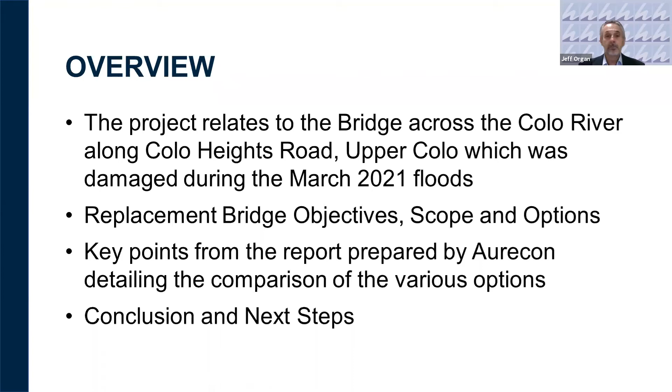So this is basically connectivity 101. We want to make sure that this bridge here improves access and supports the heavy vehicle movement necessary in the local area, and I'm very conscious of not saying this is going to open this up to highway style traffic. This is about making sure that the local community can get their farm vehicles and fire tankers and all those things across, and that and no more.

But we've got to design that road and bridge to be able to do that, and also to make sure that the journeys that everybody is going on are reliable and safe at all times. And that's going to continue for many years. So our objective is to have longevity in that, and making sure that it's resilient to the somewhat harsh environment that exists up there in terms of flood and fire in the rural areas of the Hawkesbury, and particularly in Upper Colo. And we've also got to make sure for the overall community that we've got a cost-effective construction, and make sure that our future maintenance is readily done and is, as I said, cost-effective.

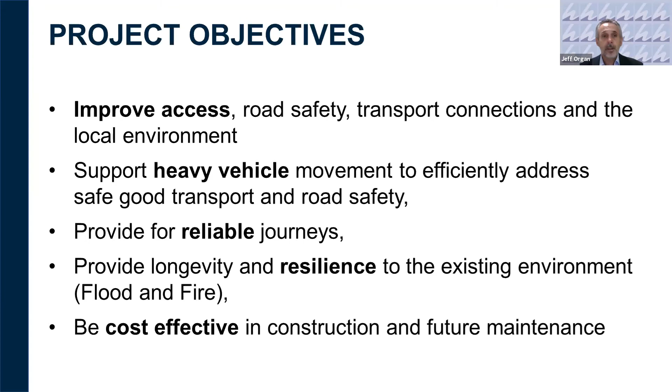So in terms of the scope of what we're looking at: replacing basically the existing bridge, maintaining the existing waterway area under the bridge at least, and designing the structure for the frequent overtopping that occurs. As certainly demonstrated by the flooding, the pressures on a bridge structure are enormous and can take, particularly a timber structure, a long way downstream. There's also those overtopping loads.

And at the moment, that deck level on the old bridge is around about 5 metres AHD. AHD basically equates to above sea level for all intents and purposes. And as you're aware, there's certainly significant potential for floods to go above that height, with the 1 in 100 year flood level around about 20 metres. So 15 metres of water over that bridge in a major flood. There is some potential to raise that bridge up by around about 1 metre to provide some better flood immunity in smaller floods, but certainly not considering raising the bridge up to the 1 in 100 year level.

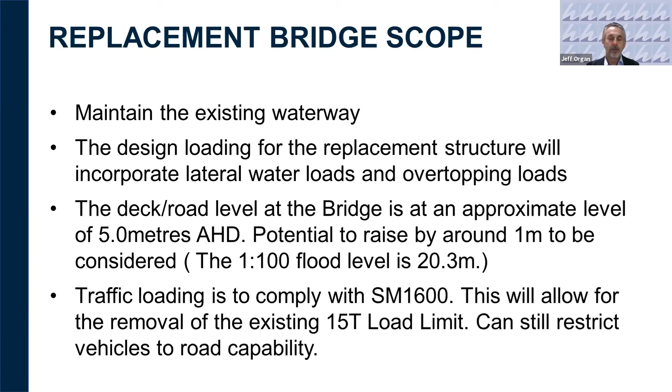Again, just the traffic loading, we want to design this bridge to contemporary standards. It's currently got a 15-tonne load limit on it, but we'd certainly remove those restrictions with a bridge that's designed to contemporary standards. But as I said before, we can still ensure that the vehicle or any other restrictions on the immediate road network are maintained to maintain the safe passage and the road capability. So just because we have a bridge that can withstand heavier loads doesn't mean that we're going to open up all the network to heavy vehicles.

So really the two straightforward options are to replace this bridge in a timber or reinforced concrete structure. And following some discussion with council the other week, we did look at steel options. They're not particularly viable, and I'll let Tom talk about that. As I said, we're going to try and match the bridge deck level to the existing heights, or with a slight increase. And the new bridge being similar, so a single lane bridge, but with a pedestrian pathway or area on the side. The existing bridge is around about 6 metres, with about 5.5 metres between the curbs.

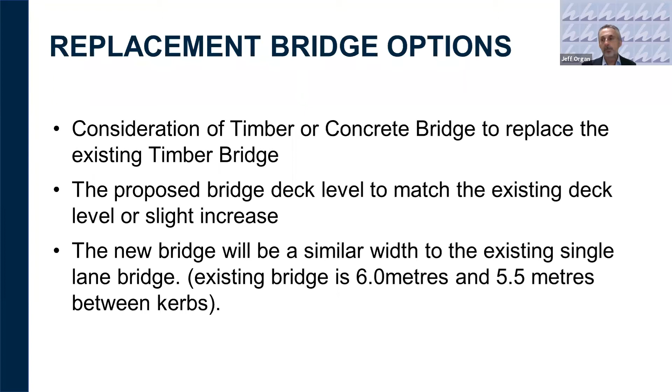So we did commission this options report from Aurecon, looking at replacing in timber or concrete, satisfying those load limits, and looking at all the life cycle cost issues, which go really to the heart of that longevity that I talked about earlier, and reliability.

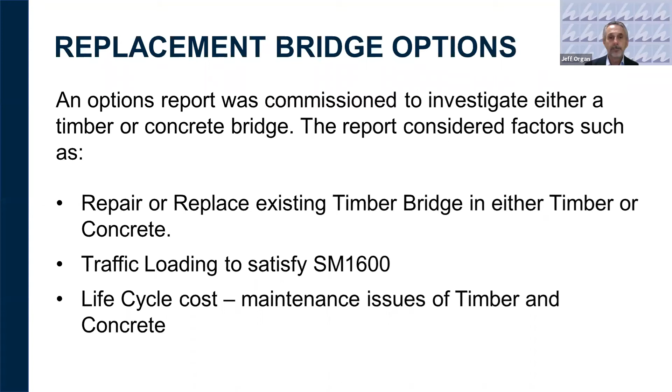So the other aspect of this is obviously that there's been a fair bit of discussion about the heritage value of the site and the old bridge. As I said, it's had a number of gestations, so various elements of this structure have been replaced over the years due to flood damage, with it originally being built back in 1938, I think it was. So there's certainly been some damage done to it, and deterioration, and works have been carried out at various times.

So we're very conscious of the setting of this bridge, and we certainly do understand there's some sympathy for replacement in timber. But we need to look at this from an objective point of view and say what's going to give the community the best overall outcome. That's why we've engaged Aurecon to do that independently.

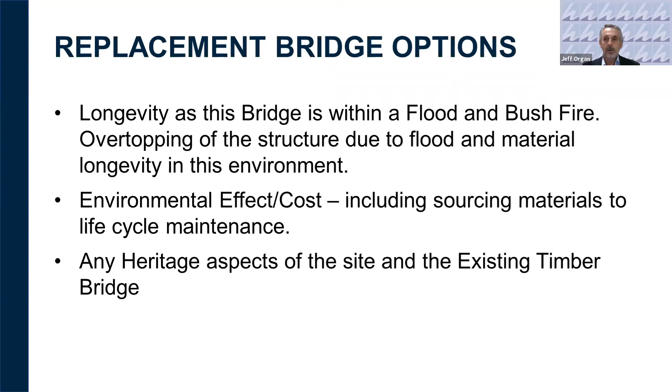So with that, I'll hand over to Tom. I'll stop sharing for the moment and let Tom introduce himself and continue through.

Tom, you're on mute. Yes, there we go. There we go.

Yeah, thanks, Jeff. Councillors and community members of Hawkesbury local government area, it's my pleasure to present a summary of this report that we've put together. My name's Tom Sheasby. I represent Aurecon, and let me just get this going. So we were commissioned by council to investigate a suitable option for reinstating the crossing over the river.

Aurecon is an engineering, design and advisory company. We operate across Australia and New Zealand and in parts of Asia. For many decades, we've provided services to Transport for New South Wales, the Bridge Engineering Group, if you like. And they have a whole lot of timber bridges that they maintain and have looked after over many years. They have something like 1,000 timber bridges.

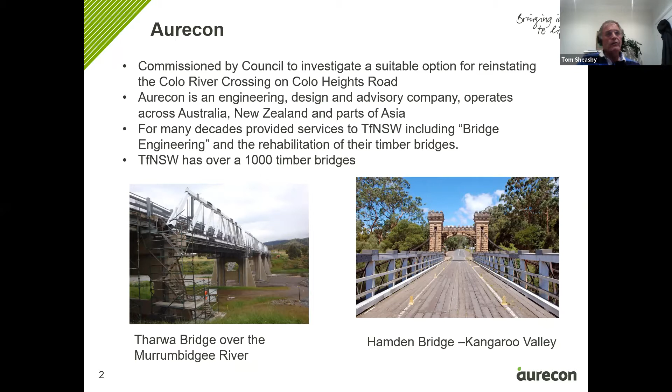Some of the bridges that we've had involvement in are the two pictures down below. Tharwa River Bridge over the Murrumbidgee, where the trusses were completely rebuilt, and then the Hampden Bridge down in Kangaroo Valley. Both those bridges are heritage listed.

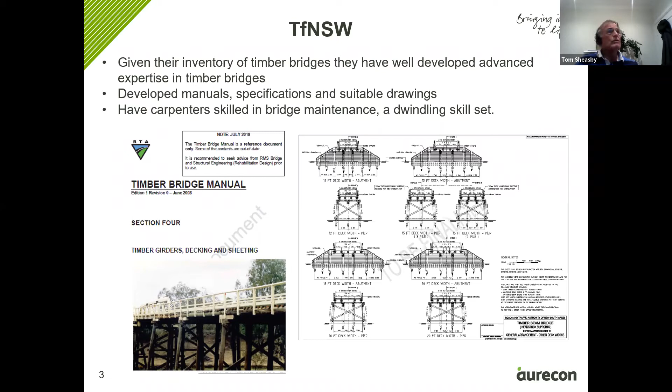So for the timber options on the Colo River, we've relied on the tried and tested materials, standards, maintenance requirements, and life expectancy based on Transport for New South Wales experience. We visited the site on the 16th of July. And as you know, the damage is on those three northwestern spans that went missing in the March flood.

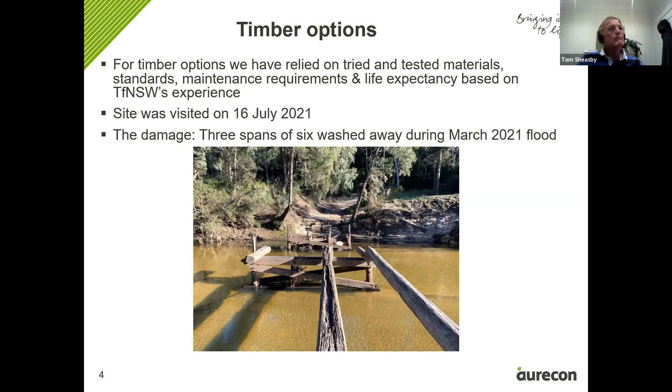So the crossing, just to summarize the level of susceptibility, is susceptible to flood damage, washaways. A feature of the crossing is that it's comparatively regularly overtopped, which is unusual for a timber bridge. It's also susceptible to fire damage, being in a well-vegetated area. Its support piles are in standing water, which is not recommended in the Australian Bridge Design Code, the latest version. And timber requires regular inspection and maintenance as documented in Transport for New South Wales manuals.

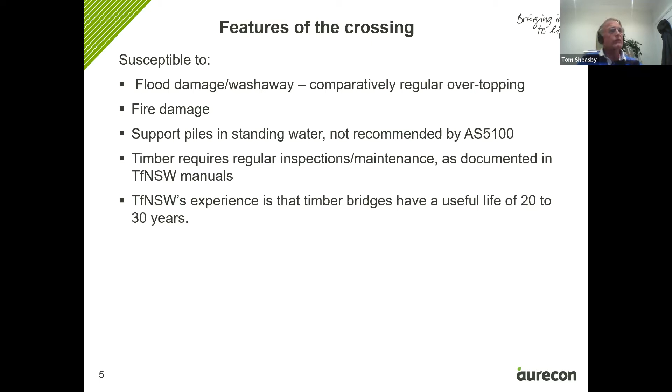Transport for New South Wales, from their experience, have determined that timber bridges really have a useful life of between 20 to 30 years. So all of these features were taken into consideration in considering the options. There were two timber options considered. We called the one T1 and the other one T2. T1 is rectifying the existing bridge, in other words, merely reinstating those three missing spans together with the piers and substructures. And then T2 was a complete rebuild.

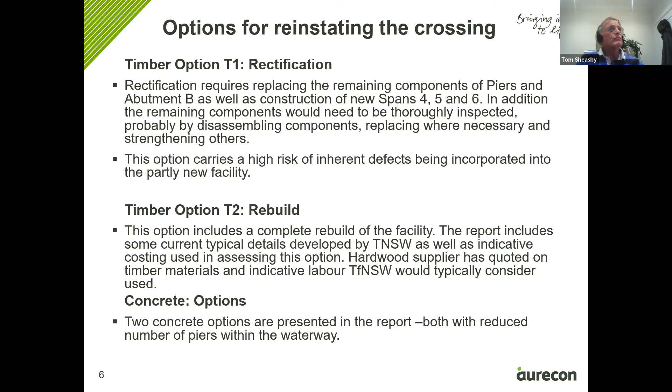There was a concrete option considered. We split that into two sections, but essentially they're both concrete options. I don't think I'll run through those points. We'll just move on. So in the options comparison, we've included a table that identifies 10 ranking points or constraints associated with each option, and we rated them with a number between 1 to 5, 1 being the lowest score in terms of handling that constraint, and 5 being the more preferable rating against handling the particular constraint under consideration. There's a degree of interpretation as to how you do the rating, but at the end of the day, you can change the numbers slightly, but the outcome we believe would not really change.

So I'd like to just run through these particular constraints, and the first one is the inspection regime. So we rated concrete the best there, whereas the 2 timber options get a lower rating. Timber requires annual inspection with a more detailed inspection every 3 years. And then the concrete option, really, you don't need to inspect other than perhaps after a major flood event. But nevertheless, we've allowed for a 10-year cycle.

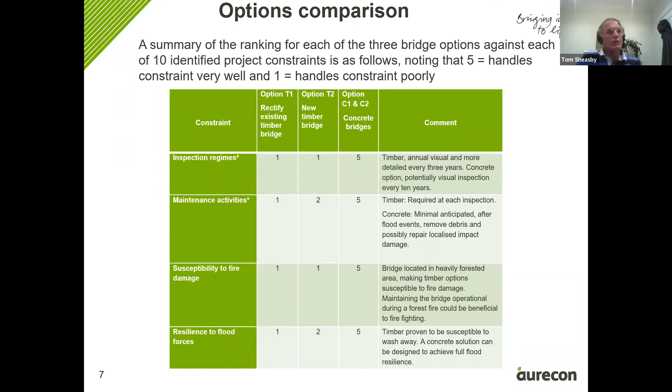The third constraint then is susceptibility to fire damage. Timber, of course, by its nature rates poorly, whereas concrete would rate top marks. I think that's self-explanatory. Resilience to flood forces, we've rated concrete highest. The concrete options can be designed no matter what the level of flood is that crosses over the bridge, whereas timber is susceptible to flood damage. And of course, that's been proven with this recent March flood.

Material availability: in the pricing and consideration of timber, we approached a hardwood supplier who provides regular supplies to Transport for New South Wales, and there is a selection criteria that they have to go through, particularly selecting certain types of timber, and there's generally an 8 to 10 month delay in obtaining those timbers. And of course, concrete and the reinforcing is far more easily available. So we've rated the concrete option higher than timber on the material availability criteria.

The design life: timber, once again, 20 to 30 year life, whereas concrete can be designed as a default option really for 100 years. So it scores top marks there as well. The design loading on concrete would be designed for taking the maximum load that's within the standards. But more importantly, that load rating doesn't deteriorate over a period. It remains at whatever it was initially designed for, whereas timber does diminish, which is borne out by the fact that that bridge, prior to its damage, was rated at, I think, 15 tons. So on design loading, concrete scores the highest, whereas the other two are much lower.

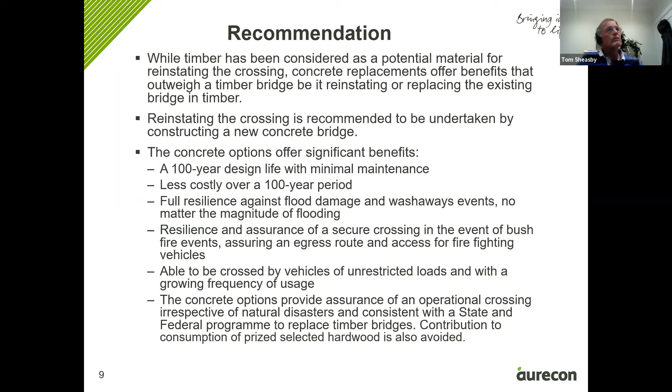Its resilience and assurance of a secure crossing in the event of bushfire events, assuring egress, which is important, as well as access for firefighting vehicles. It's able to be crossed by vehicles of unrestricted loads over its design life. And the concrete option provides assurance of an operational crossing irrespective of natural disasters, consistent with state and federal programs to replace timber bridges. Contribution to consumption of select hardwood timber is also avoided, and I suppose that goes to the question of sustainability.

So looking very quickly at the cost, and the costing schedules are included in the report, if you look at the right-hand column, the two timber options over 100 years, taking pure cash flow, would be 4.4 million over 100 years, whereas the concrete option is 1.7. If you adjust those figures to a present worth value using an inflation rate of 2% and interest rate of 4%, those numbers come down to 2.4 for the T1 option and 2.35 for the timber T2 option. And the concrete is still the lower figure, being around the initial capital cost.

And that's all from me, Jeff. Okay, thanks, Tom.

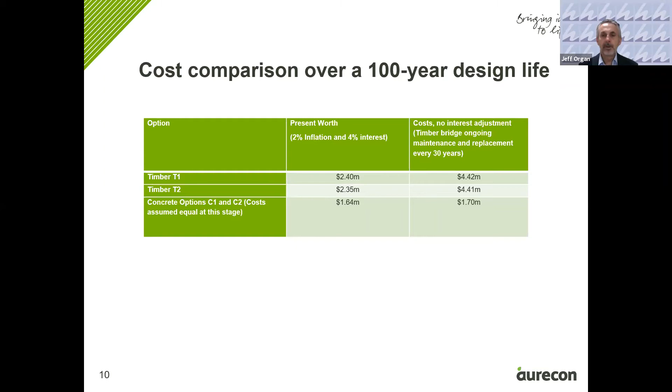So I guess that's the technical side of that. And I should also add that Aurecon have not been engaged to do detailed design of either timber or concrete options. So they are basically independent of the process.

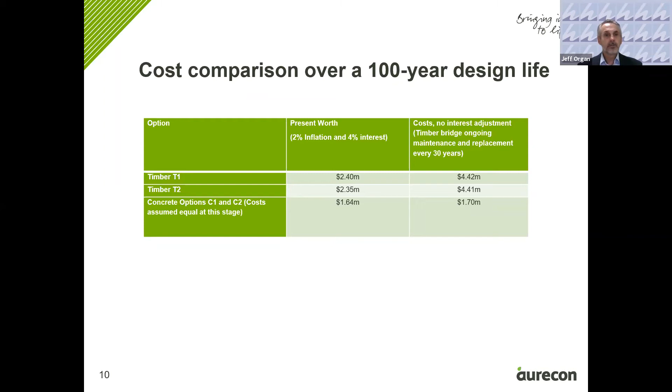So the next part of the presentation is really about, as I said, certainly aware that there's some desire potentially for a timber bridge, and there's other values there. Probably just add to Tom's presentation that obviously timber bridges were the material of choice and convenience for many bridges. As I said, there's still 1,000 timber bridges that Transport for New South Wales operates.

Council also still retains a number of timber bridges, but over the last decade or so, we've certainly been replacing those as part of that Commonwealth-funded program to provide better resilience into the road network. So again, we've replaced, I think, 6 or 7 bridges in recent years from timber, which were failing, load limits on them, to something that's probably contemporary and the better solution.

So we did pursue the issue of the timber option right from the early days, and I know a number of the people in the community were talking to a company called TRS, and we were also speaking to them as well. They're a well-recognised firm in timber construction for various structures. So we did have some discussions with them, and they gave some initial advice, and we did engage them.

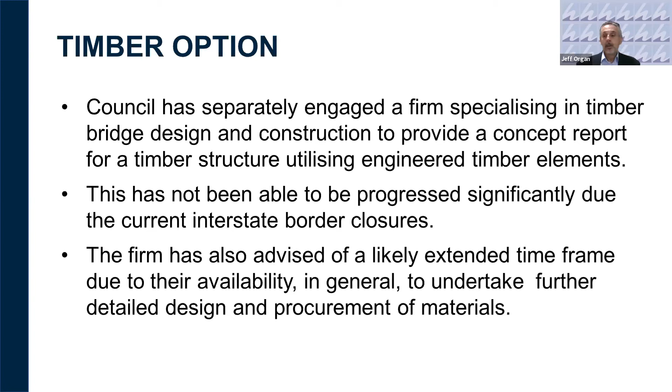So people may have seen some of the options. So this is the company that we're talking with, TRS, and WRD is their design arm. So again, they're the contemporary solution for timber bridge structures for new or replacement, other than strict heritage renewal. And some of those bridges that Tom showed for Transport for New South Wales are quite distinct and quite unique.

The TRS option is generally to use what we call engineered timbers, laminated beams, particularly for headstocks. Still relies upon timber piles, normal tree material for that, and also for the bridge girders themselves generally. Basically, what you're looking at in this image here is they actually use glulam and giant plywood panels essentially as your bridge decking material, because again, it's an engineered product and you have some knowledge and ability to predict its behaviour under load.

The normal process with that is that you don't actually see the timber bridge because a bitumen seal is applied over the top of that for waterproofing purposes, and because of the nature of those glulam panels. It is possible, of course, to build the bridge in the same style as the existing bridge, with decking materials and running boards on those. But again, they're subjected, particularly in this case, to frequent inundation.

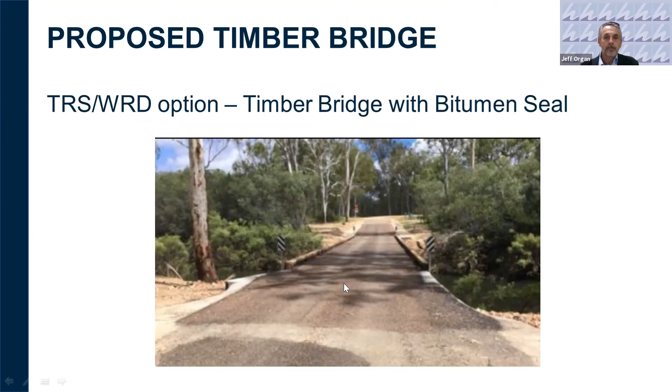Another view of that, which is a little bit clearer. Another bridge that TRS have built using that methodology I talked about. So again, they've got a concrete ramp approach on this side here. And again, the timber curbs with scuppers to allow for drainage and the seal over the top.

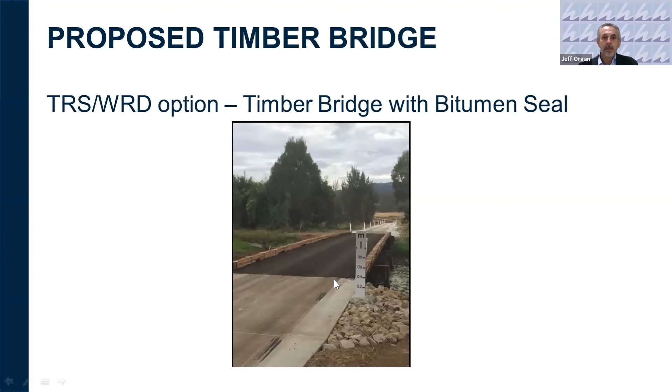So that's basically the point that it got to. We can certainly continue that on, but there are some delays, and I'll go through those at the end of the presentation in terms of timeframes, if that were to be the option selected.

We did look at the reinforced concrete bridge option in a fair bit of detail in parallel with the timber bridge option, and we do have preliminary designs in progress. And as I said, the market there is well experienced in designing these structures. They're relatively simple engineering structures that can be designed fairly quickly.

So the geotech investigations were undertaken, obviously down to what the bearing material in the river itself appears to be. We looked at a range of options, and given maintaining waterway and the need to get slenderness in the superstructure itself, replacing it with a 5-span bridge.

And we could also look at, again, preempting the appearance issue, some of the non-structural elements in the bridge, such as the kerbs being constructed in timber, so that it gives you that similar appearance to what we looked at in that TRS image.

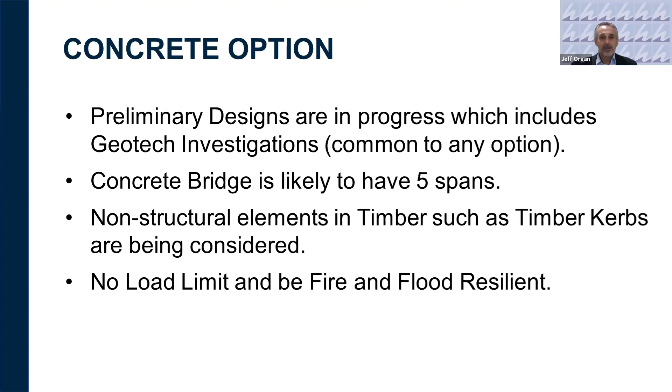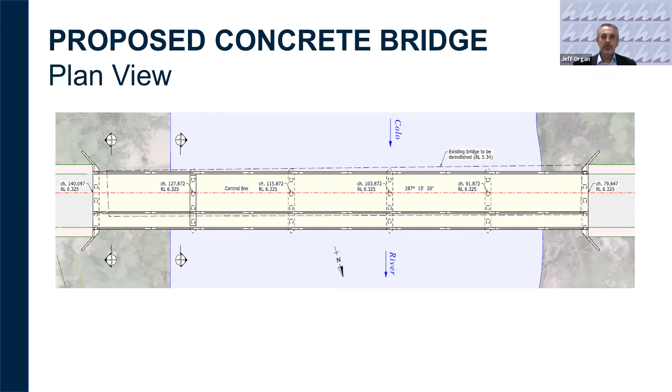Again, in a cross section, this is not shown, taking the piers all the way down to the bedrock in the river. So we understand from the geotech and also the original design plans for the timber bridge that bedrock's around about 20 metres down below the normal bed level of the river, which is also an issue in terms of procuring suitable bridge piles in timber. If you're looking at turpentine, it's very difficult to get engineered quality piling 20 metres or 25 metres long, and they would probably need to be joined as they're driven. So again, another weak point in that.

And I sound like I'm probably talking down the timber option, but I make no apology for that when we get to the end.

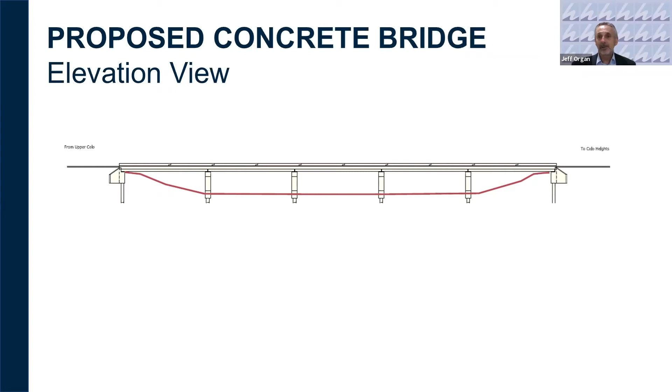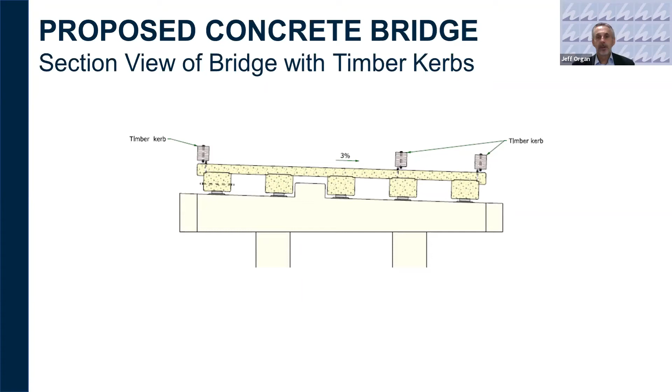And again, just the configuration of how a concrete bridge works. We've got the kerb, the cast in situ deck level, pre-stressed beams below that, then what we call the headstock, which distributes the loads from those beams. They go into the columns, and the loads from those columns are transferred down into the pile cap and down into the piles that are driven into the river. So regardless of whether they were timber or concrete, these would be driven piles, not bored, and driven down to refusal at bedrock level.

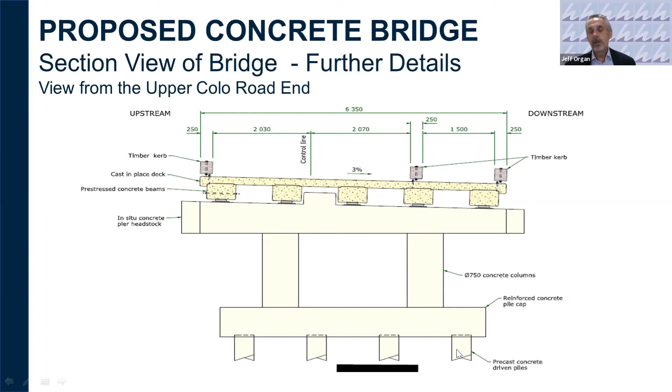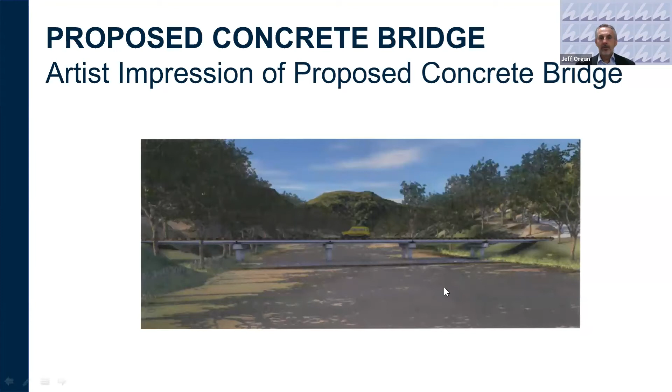Again, just a mock-up. Certainly, this is a shorter bridge, and we've shown the timber kerbs on those. We've only shown two here just for clarity, so you can see that. Again, with a concrete deck, we wouldn't put an asphalt seal over that concrete deck. We normally leave those exposed. It doesn't preclude a seal into the future if there's deterioration of the immediate concrete surface. So again, the visible area would be with the timber kerbs.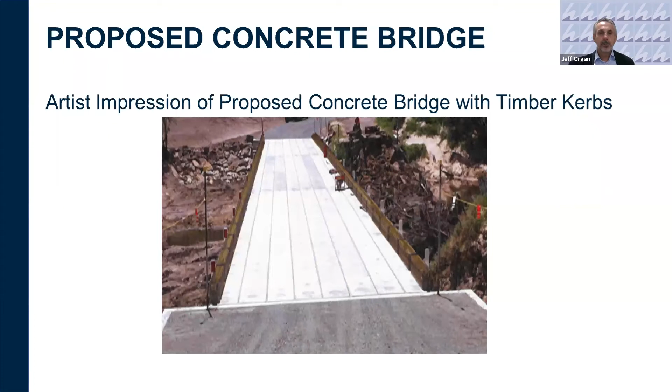As I've indicated, we know there's a certain level of community sentiment to retain or replace the bridge in timber. It's certainly not our recommendation that would be the desirable thing to do. Certainly not the T1 option. Nobody can guarantee what the condition of those piles are below the water. If we were to retain that structure, they would need to be replaced. So certainly the option of reinstating or repairing the existing bridge, I don't think it'd be very easy to find somebody who would certify that.

As I said, the issue out here too is also that this is a bridge that at this level, as a low-level structure, is certainly inundated and subject to significant flood forces, but also the damage that occurs from debris loading, and also being underwater for a certain period of time is not good for timber in that area.

We think there's a number of options to achieve a higher level of aesthetic quality, as I said, using timber elements and minimising the depth of the superstructure, and potentially some neat engineering solutions to make those headstocks appear a little bit more slender from the outside appearance looking upstream or downstream.

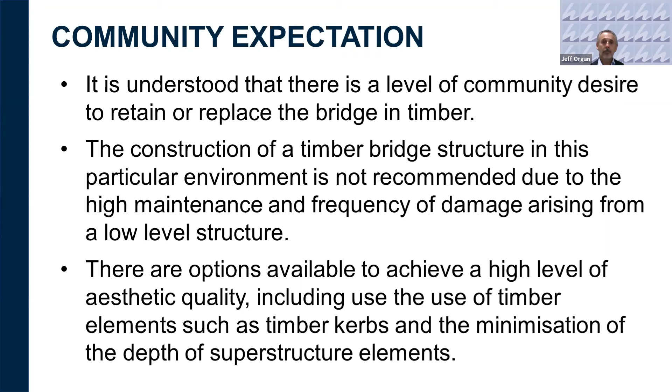The next steps in this, I guess, and this is kind of a timeline to just indicate the other aspect of this, which is the constructability and the time to get this going. If we're looking at a concrete bridge option, we believe that the design can be finalised in the next 6 to 8 weeks, taking us up to around the end of October. In parallel with that, we would undertake the planning approvals. That'd be the review of environmental factors.

So when you're doing anything, particularly in a waterway, we've got to make sure that all of those environmental issues are ticked off and managed. That's part of the course of doing these things. So fisheries, we've got Aboriginal and European heritage, threatened species, all sorts, and other regulations that apply to this.

In parallel with that, but probably concluding in early November, we would prepare the tender documentation based on that design and any requirements from the environmental studies, and put that out to tender. Ideally, we'd be trying to aim for late November, but December, January, going to tender, and then awarding in late February or March.

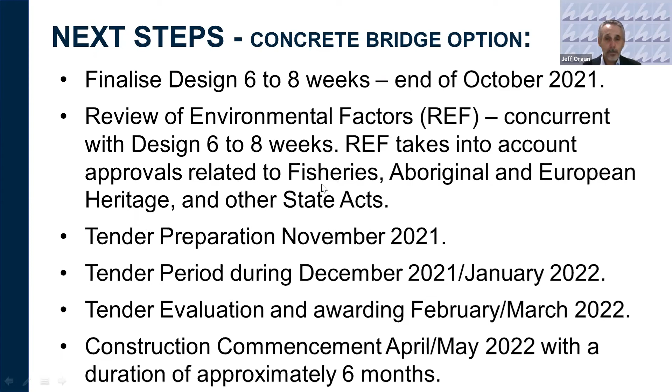That would enable a construction period of around 6 months. So it'll take us up into the early third quarter of 2022. So around the July, August period for construction of the concrete bridge option. Excuse me.

Basically, in the comparison of those timelines for the timber bridge. So as indicated, if we were to use TRS, it's unlikely that we'll complete that design in the current calendar year, simply because of the delays in access likely to be able to get across from Queensland. Obviously, there are other companies that can do timber design, and Aurecon could certainly do that, I guess, or any other firm.

However, the key thing is all of those other aspects. Concrete is a far easier design option, as said, with well-known methods and practices in place. It's relatively easy to get that done compared to a timber design. Having regard for those timeframes, we would not be likely to get out to tender until May, early June of next year. That also includes, as I said, the potential delays in timber supply. Again, that would affect the design.

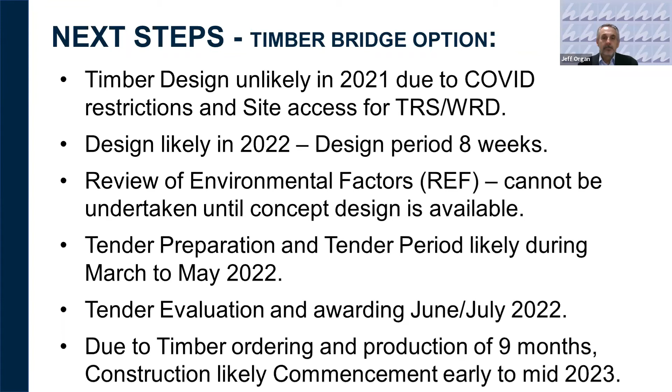There may be that we can look at different alternatives in timber. I'm not certainly ruling out and making the supply issue of the timber critical, but as I said, even if we started today and knew exactly what it was that you wanted, you're looking at 8 to 9 months, which is still taking us up to supply of timber in the April of next year period before you would even start construction. So again, there's probably at least a 3 to 4 month, being really optimistic with the timber option, delay compared to getting a concrete bridge underway.

So I said, I've got to be really blunt and honest. I said, the existing timber bridge really should be replaced with a concrete bridge. This is the one thing that's going to give the community the reliability, the longevity, and the broader community the cost saving that comes with having a properly engineered structure out there that's not subject to the vagaries of flood and other damage.

I'm certainly happy to make the more detailed report that's been prepared for council by Aurecon available, and certainly have the community make comment on that or ask any questions on that through an engagement process.

I think the other thing too that's come up is that we can actually salvage the timbers. Normally when a timber bridge is removed, the last thing anybody thinks of is what you do with the old bridge timbers that maybe could be repurposed, remilled and put to some other use. So we think there's some options there, and we'd be looking at having those materials salvaged and going through a process where they might be able to be reused in the immediate area there, potentially in the small car parking area on the other side of the river on Colo Heights Road.

As I said, I think we can also, in the concrete design, explore some options to maintain some degree of aesthetic qualities in there, and make sure it's in keeping with its setting. Again, that can be the timber kerbing, maybe some timber elements or fencing on the approaches, or how we actually shape the bridge itself.